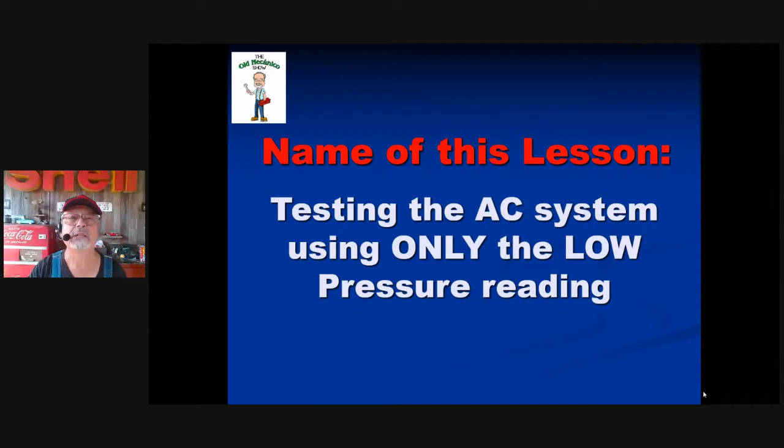AC lesson number 8: testing the AC system using only the low pressure reading. And we know to stay away from the high.

Before you connect the gauges, let's go ahead and identify the signs the system is low. Sign number 1: the vent temperature is not that cold. The customer knows that's why they're there. It's not that cold. It's probably low on refrigerant under the hood.

Suction line is still an excellent test. Suction line is not cold or barely cold. On a good working air conditioning system, that whole suction line should feel like it has ice water running through it, and it should only take seconds at the beginning. That's sweet spot number 1, to get cold. Suction is either barely cold or not cold.

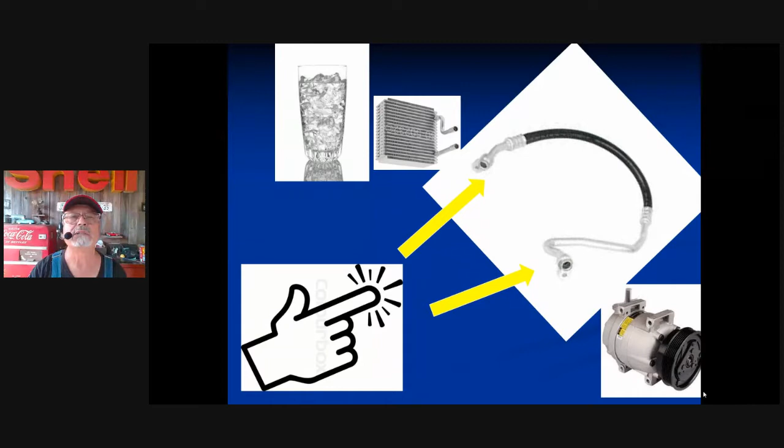Sign number 2 that the refrigerant is low on the system: the clutch. You notice the clutch is not staying on.

This is a good time for me to explain why you have to know the 2 types of refrigeration systems. I explained them to you, but I forgot to tell you the reasons you have to know. You have to know what you've got for a bunch of reasons, and this is the first example, and it's a good one.

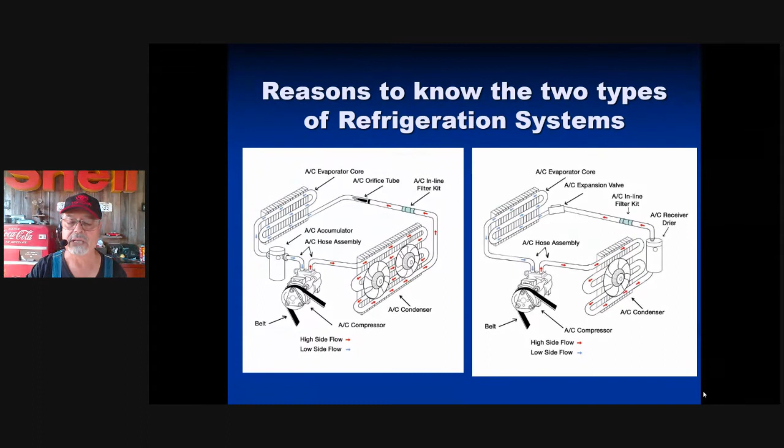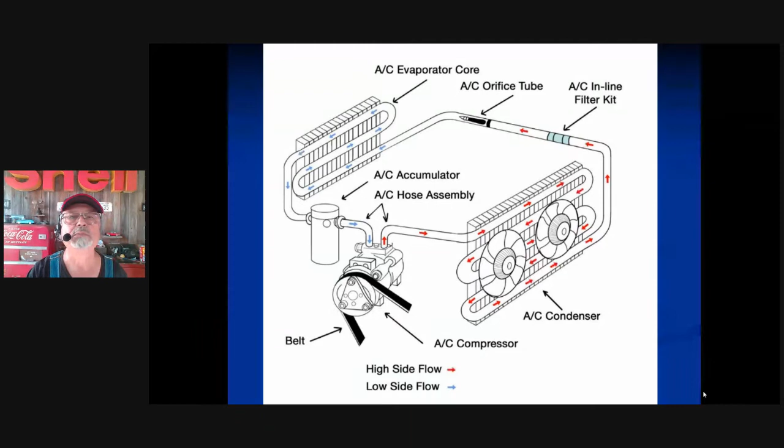If you have a tube type, you identify it by looking for the accumulator. If you have a tube type, understand that the clutch is going to be very sensitive to low pressure. The way the tube type controls the temperature/pressure is by turning the compressor on and off, like the unit in your home. It turns on for a little while, and when it reaches the right temperature, it turns off and stays off until it needs to come on. On the tube type, it's very common for the clutch to turn off.

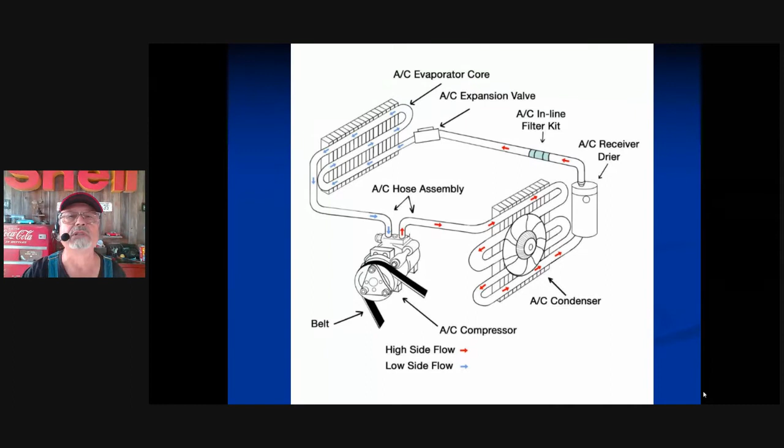The clutch won't stay on. However, if you have the other type, the valve type of refrigeration system, the clutch is not a sign. You can be very low on refrigerant, and the clutch on the valve type will not turn off. They control the pressure/temperature a different way - they don't cycle, they meter. They change the passage inside the valve to control the pressure/temperature. On these, it won't hardly turn off until the system is almost at 0.

So reason number 1 you should know what kind of refrigeration system you have is for proper diagnosis. They don't all cycle off - the tubes cycle off. Let's go on.

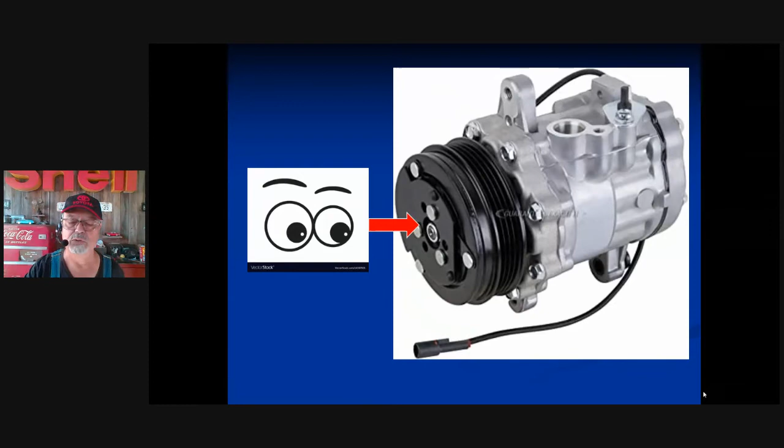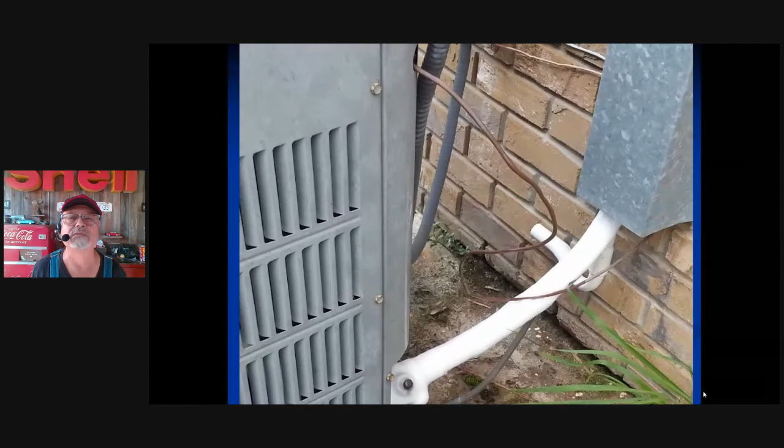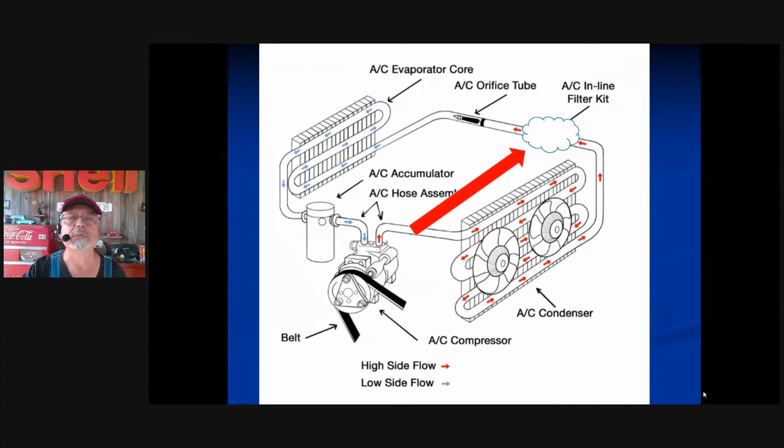If the tube is located - and most late model vehicles have the tube early in the line - if the tube is early in the line and there is frost just past it, that's a sign that it's low on refrigerant. The system is begging to work, it just needs more refrigerant. Remember, the tube can be at the end and the tube can be in the middle. That's why you should know what you're working with.

Again, let's go over the signs. It's obvious the vent temperature is not very good. Suction is barely cold or not. If you have a tube type, I can say it now, you have rapid cycling.

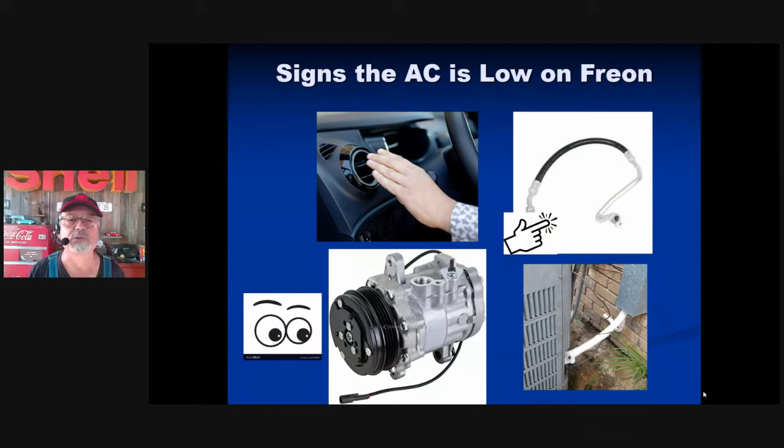That clutch should stay on until it's comfortable inside the passenger compartment. And if you're super savvy, you can show off by knowing there's a tube looking at it, and actually seeing the frost. All right, it's time to measure the low side pressure.

There they are, high side, low side. Who knows why we don't need the high side? Who knows why we should actually avoid it? And on particular ones, don't even look at it. We really don't need the high side.

There may be some readings coming at you, but let's talk about the caps. See those caps? They're way more important than you think. They can be a lifesaver.

Here, connecting the gauges to either the high or the low, you take a risk. A risk of what? Creating a leak. These service fittings, some of them are terrible. If you connect, chances are you might have a leak. And if you can't replace it or fix it instantly, those caps, a good cap will stop the leak.

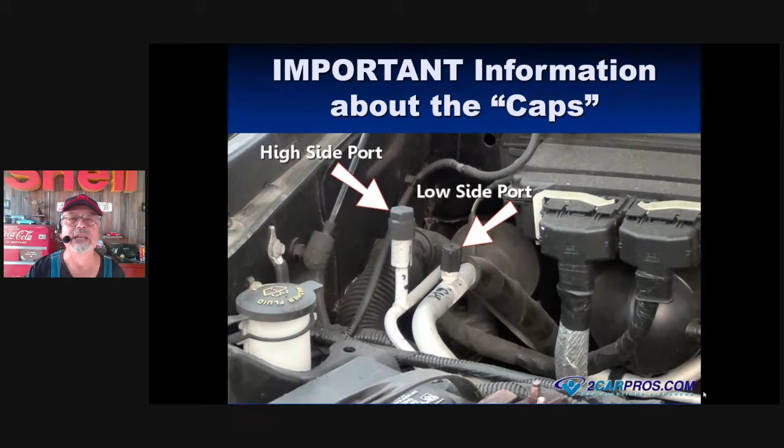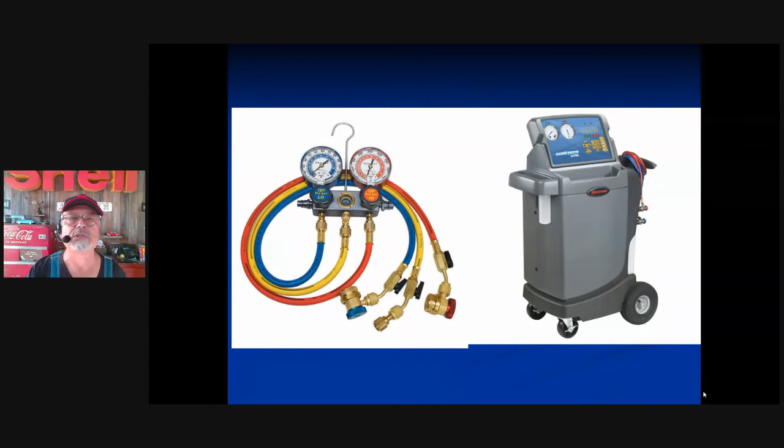Hey, let's connect. We connect. Now you're just going to have to get your hands on it. The lab's coming, right? Whether you're using gauges or a station, the information is the same. We have to understand the second reason why you have to know your refrigeration types on the screen.

Hey, yes, I know we're reading blue and red, but let's start at the top. Static - we are measuring the pressure with the engine off, AC off. It's not that hard, it's not that complicated. Let's keep it simple. What do we got to start with?

Now they're saying that this is a fully charged system at 70 degrees. That's not us. Notice what we have. But the most important thing that I need to show you at this time is an additional test.

We're testing two things here. We're testing static pressure and we're testing equalization. If you'll notice, the blue is right at 70. And if you look at the red, it's pretty darn close - it is the 70. The high side and low side are equalized. That can be a test if you're smart enough to pay attention to it.

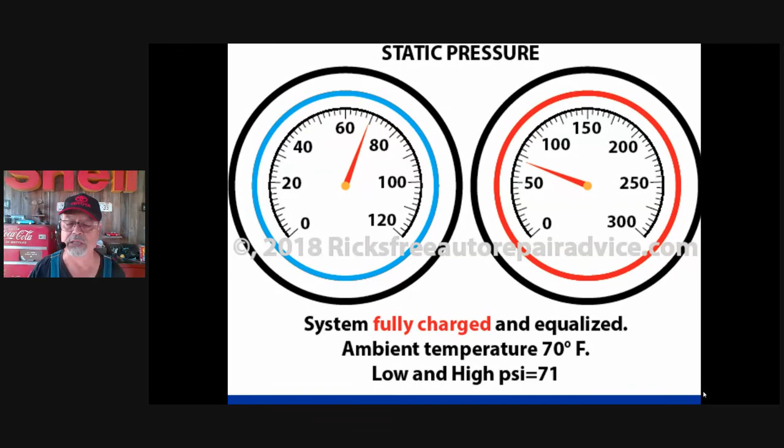And unfortunately, here we go again. Only the tube types equalize. Valve types will not equalize. That's just information you have to know. I know it might be a little confusing, but let's go on a little bit.

No, this is not normal for Corpus. You know what it's like. In fact, we have it the worst of anybody in the state. We're right on the coast. Sure, it's hot in Austin and Dallas and Houston, but we're extra uncomfortable because of the humidity. I've paid attention to the humidity in Houston and Port Isabel and Brownsville.

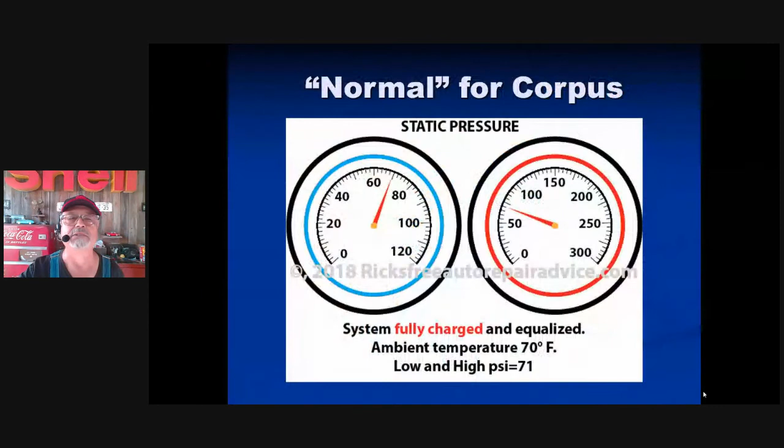We have it the worst, and yes, it's hard to cool us down. All right, let's try to get normal. Here in South Texas in the summertime, 100 easy, plus or minus 5. Static pressure - this is what's normal for Corpus, not 70, that's Colorado.

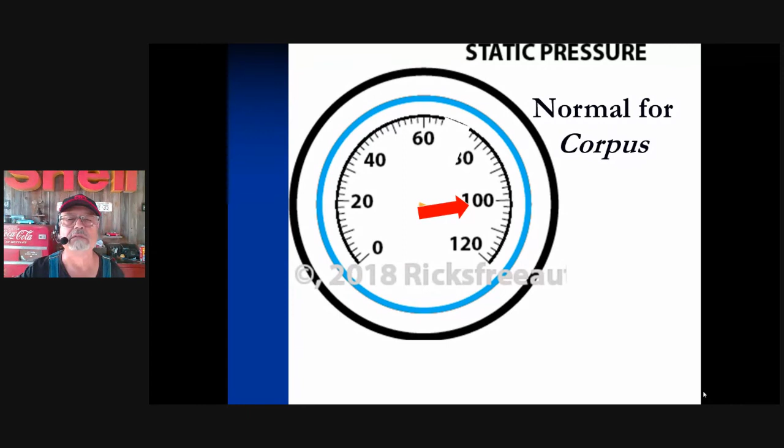Okay, static, engine off, low side. We don't need the high side. The less service fittings we touch, the better. You can do everything through the low side.

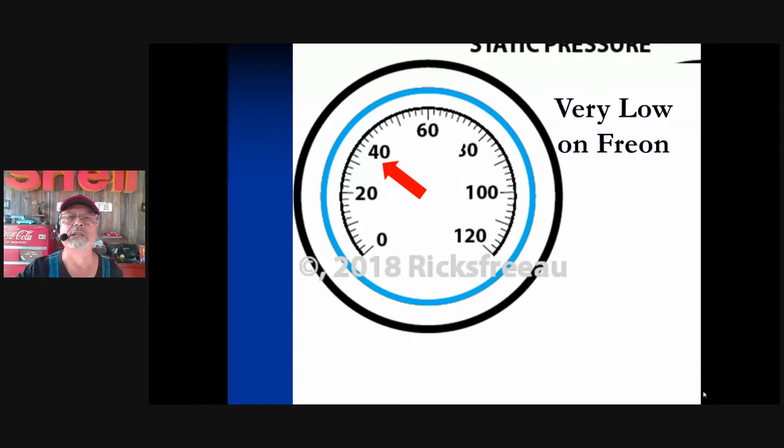You already know it's low on Freon. Now it's very, very low. The darn thing is empty.

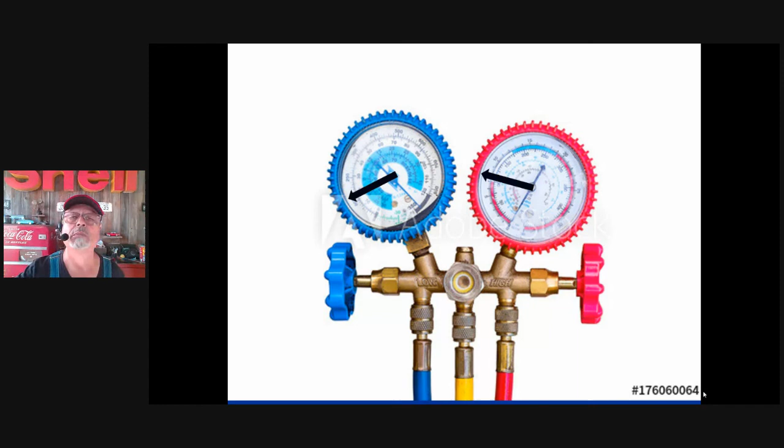Before I get all carried away with a bunch of abnormal readings - wow, look at all of those - before I get you all confused with those, let's take a quick look at something that looks like this. It's low, but no. Let's just finish this off.

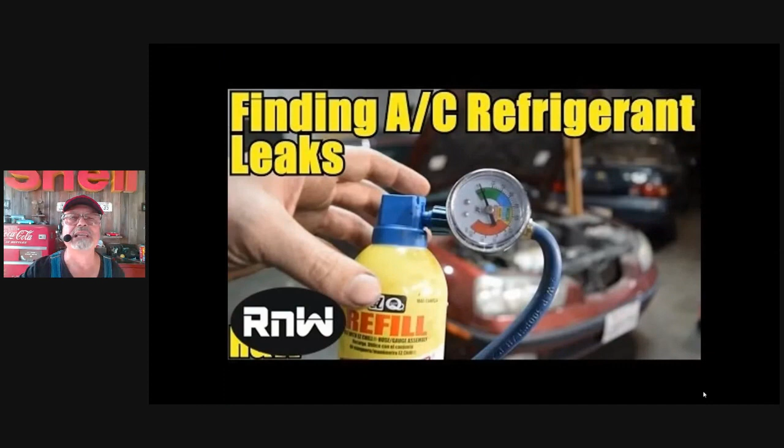Let's concentrate on the most important lesson. One of the most important lessons of this semester is finding those leaks. Remember, there's 6 methods to find leaks, and more leaks. That will be the next lesson, lesson number 9: how to find refrigerant leaks.